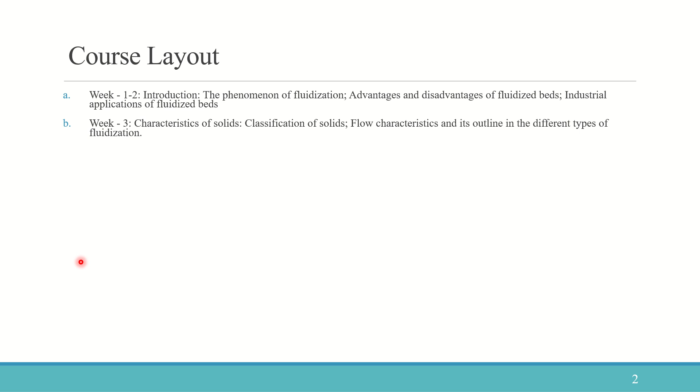Moving on, we have also seen the different regimes of fluidization based on the fluid inlet velocity, and different ways to calculate the frictional pressure drop. Later we saw the solid movement inside the bed in terms of mixing, segregation, staging, and we'll see some more today. We have also seen gas distribution in fluidized beds and why it is important, because we pass the fluid using a distributor, which should ensure that the pressure drop is sufficiently fine.

And design of distributor is also there, like we can use porous plate distributor, perforated plate distributor, and nozzle type, tube type. So based on our application and our economical efficiency, the distributor type would be chosen.

And later it is about the most important thing, bubbling fluidized beds. Why we call it important is because whenever we use the gas as a fluid, bubbles form inside the bed, and we need to be more careful in handling the fluidized beds, because we have an additional phase which becomes important, and we need to know and study the bed

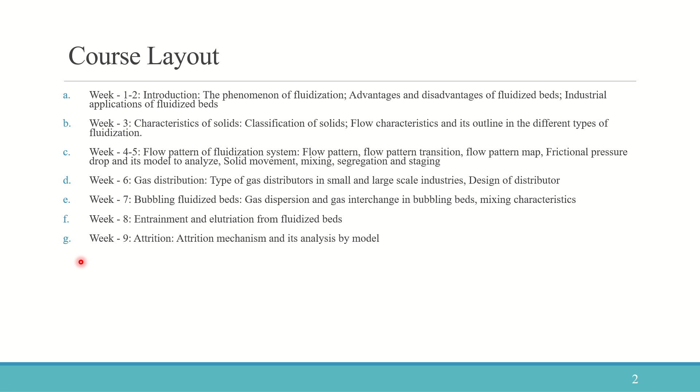accordingly. Later we have also seen about the entrainment and elutriation of the solids from the fluidized beds, wherein the solid particles are carried out of the bed. And last it is about attrition mechanism, and finally it is about mass transfer phenomena and the heat transfer phenomena.

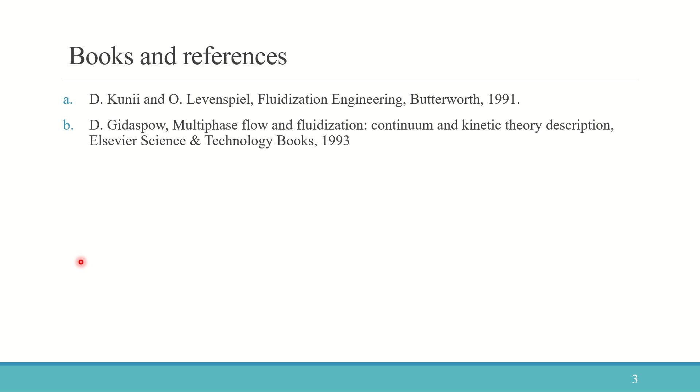So the books basically involve Kunii and Levenspiel's Fluidization Engineering, Gidaspow's Multiphase Flow and Fluidization, Gibilaro's Fluidization Dynamics, and Majumder's Hydrodynamics and Transport Processes of Inverse Bubbly Flows. So we have seen well enough with regards to books and references.

So if you want more detailed analysis of the books and references, I would suggest you see the old videos from week 1 and 2 and so on, which give a more in-depth analysis. Basically, Fluidization Engineering by Kunii and Levenspiel covers almost all aspects with regards to fluidization, and it would be very helpful. And followed by Gidaspow's Multiphase Flow and Fluidization, in which the modeling aspects are also covered.

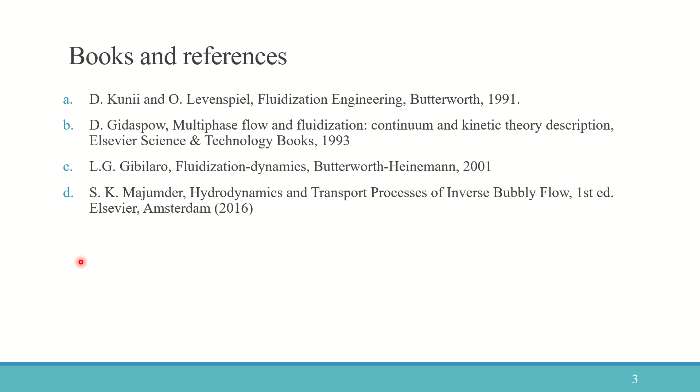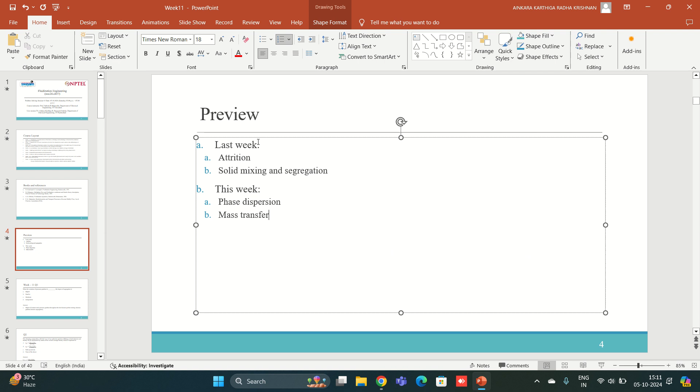So moving on, we have seen in last week the attrition, solid mixing and segregation. And in this week, we'll be seeing about phase dispersion and mass transfer phenomena. Here we have moved on to week 11. So yeah, we'll see now.

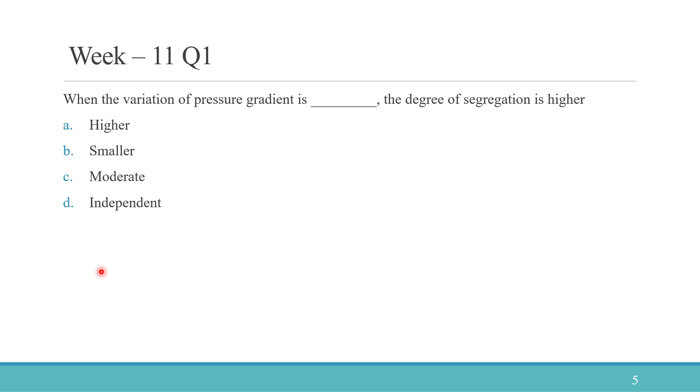Well, the answer to this particular question is option A, higher, because constant axial pressure gradient throughout the bed denotes perfect mixing, whereas higher gradient denotes higher segregation. So if there is a gradient, there is segregation, and if the gradient is higher, the segregation is higher. You can remember it in that way. But if there is a constant axial pressure gradient, the bed denotes a thoroughly mixed bed. So when the variation of pressure gradient is higher, the degree of segregation is higher. Option A is the right answer.

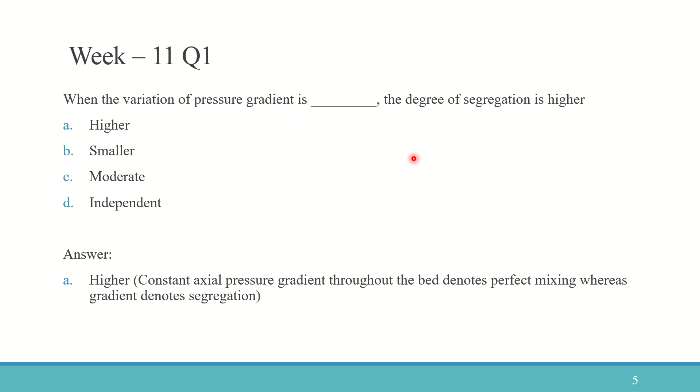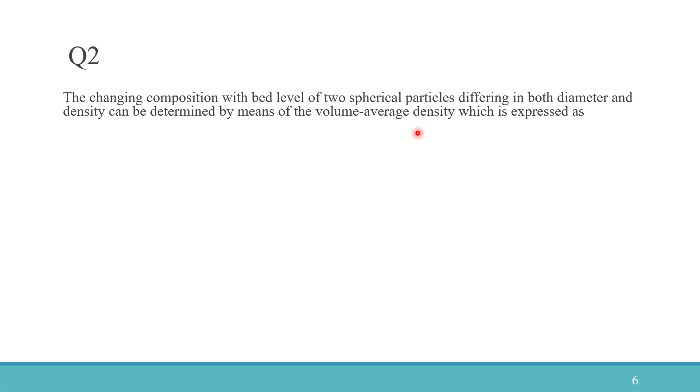Now we'll go to question 2. In question 2, it is given that the changing composition with bed level of two spherical particles differing in both diameter and density can be determined by means of volume average density, which is expressed as dash. Option A, rho_P = (C1 rho_P1 + C2 rho_P2)/(rho_P1 + rho_P2). Option B, rho_P = (C1 rho_P1 + C2 rho_P2)/(C1 + C2). Option C, both A and B. Option D, none of the above.

So we are asked to find the volume average density formula, for which we have two compositions of two spherical particles varying in diameter and density. The density of one particle is rho_p1, the density of the other is rho_p2, and it is based on the concentration. So option B is the right answer: rho_p = (C1 rho_p1 + C2 rho_p2)/(C1 + C2). Actually, if you look at the options themselves, you can understand that we are asked to find the volume average density.

So I'll give you a clue for finding the answer. This is not the exact way to do it, but just a quick clue. If you do the dimensional analysis, you can see that C1 and C2 both have the same unit. So you will be ending up with the unit of rho P1.

Whereas in option A, if you do the dimensional analysis, you will be ending up with the unit of C. Rho P and C don't have the same unit, so option A is wrong. So it can be option B or option D. And logically it sounds more like option B, so rho P is equal to C1 rho P1 plus C2 rho P2 divided by C1 plus C2 is the answer. So I hope it is clear for you guys.

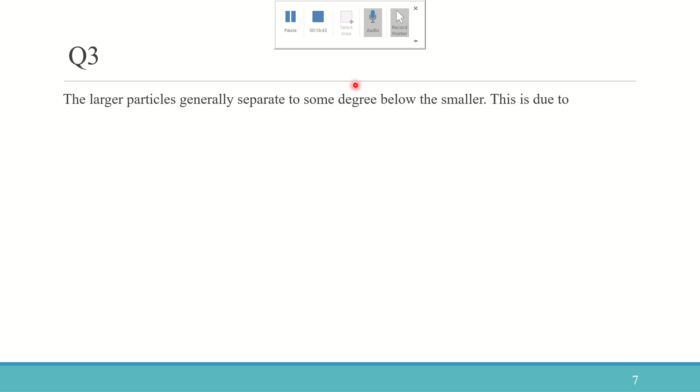Now we'll go to question 3. In question 3, it is given that the larger particles generally separate to some degree below the smaller. This is due to dash. Option A, size variation is less. Option B, bulk circulation is less. Option C, hydrodynamic uncertainty. Option D, all of the above.

So we'll look at the options one by one. First, we'll reread the question. It is given that the larger particles generally separate to some degree below the smaller. So when the larger particles separate to some degree below the smaller, what does it mean? Larger particle separation is lower. When the bulk circulation is more, the separation will be low. And if size variation is less also, the separation will be low.

Here the question generally means: when do we say that segregation is lower? So the larger particle is separating to a very small degree. If size variation is less, it becomes difficult to separate, so in that case the separation is less. And in the second case, it is given as bulk circulation is less. Again, this is true because if bulk circulation is less, it becomes difficult to...

I think I mentioned one wrong statement in the two statements before. But if bulk circulation is less, it is again becoming difficult. And the third one, hydrodynamic uncertainty might also be the reason for the lower degree of separation. So all of the above is the right answer. Now we'll go to question 4.

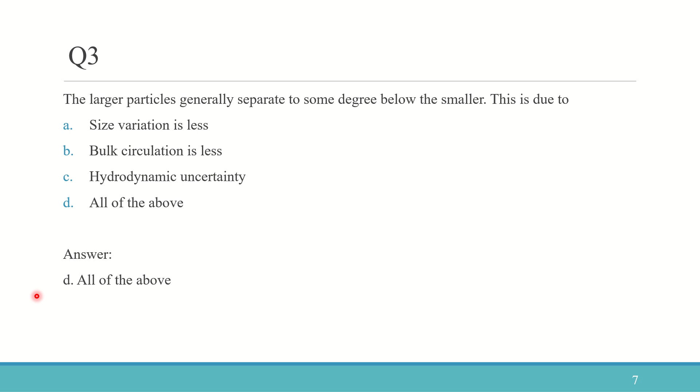In question 4, it is given that according to Richardson-Zaki 1954 theory applied for a monochromatic bed, epsilon s is the volume fraction of solids, and epsilon s is 1 minus epsilon f, and dl and ds are the diameters of a binary mixture of spheres. dl is the diameter of the largest sphere, ds is the diameter of the smallest sphere, and n is the Richardson-Zaki coefficient.

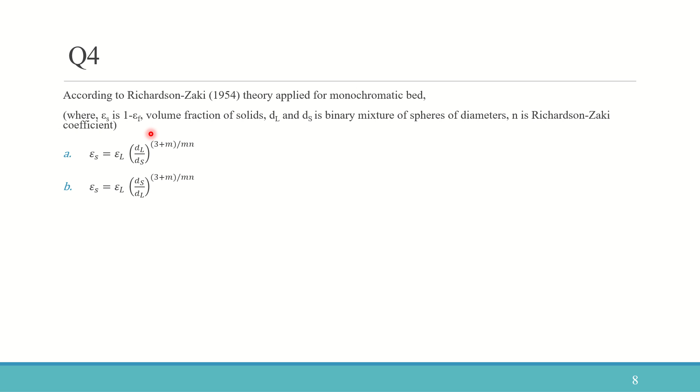Epsilon s is equal to epsilon l into dl by ds to the power of 3 minus m by mn is the right answer. So here we need to know 3 minus m divided by mn, and also epsilon s is equal to epsilon l into dl by ds. So epsilon is inversely proportional to diameter. Solid packing is inversely proportional to diameter. Diameter is small. Yeah, that is true. Epsilon s is inversely proportional to diameter, and we are raising it to the power of 3 minus m divided by mn. So the answer is option C. Now we'll go to question 5.

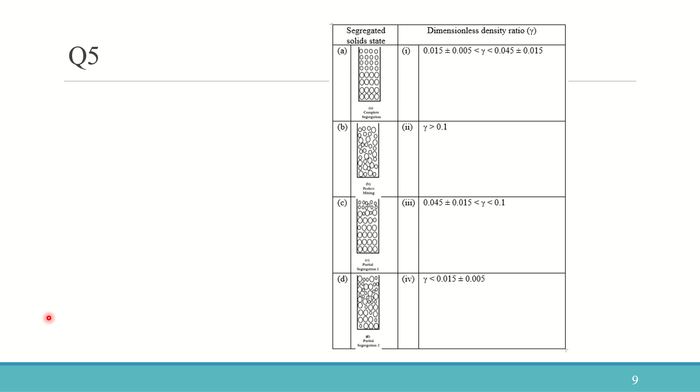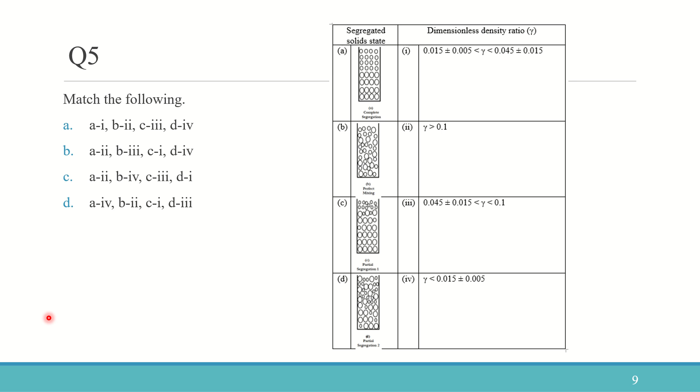Okay, here is an interesting question. We are given segregated solid state on the left hand side and dimensionless density ratio gamma on the right hand side. So we are supposed to match the left hand side with the right hand side. Now we will see the options. Option A, A1 B2 C3 D4. Option B, A2 B3 C1 D4. Option C, A2 B4 C3 D1. Option D, A4 B2 C1 D3.

So I'll give you guys some time. Please let me know the correct answer. If any one of you would come forward and answer, it would be helpful, in the sense that it would be interesting and interaction would be enhanced rather than me saying the answer. That would be great.

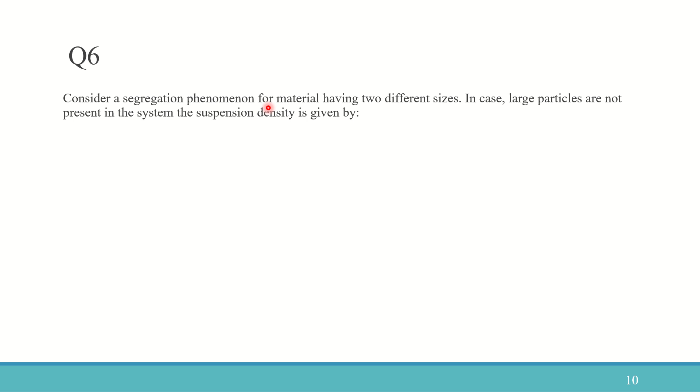In question 6: consider a segregation phenomenon for a material having two different sizes. In case large particles are not present in the system, the suspension density is given by blank. We'll read the question again. Before the options: rho is the liquid density, rho p is the particle density, and epsilon s is the volume fraction of smaller particles.

Option A, rho bs equals rho p into 1 minus epsilon square plus rho into epsilon s. Option B, rho bs equals rho p into 1 minus epsilon s plus rho into epsilon s. Option C, rho bs equals rho p into 1 minus epsilon s square plus rho into epsilon s square. Option D, rho bs equals rho p into 1 minus epsilon s minus rho into epsilon s.

So we have two sizes, a smaller size particle and a larger size particle. Its solid fraction is epsilon s and this solid fraction is epsilon L. The liquid fraction is epsilon and its density is rho. This density is rho s and this density is rho L. If both particles are present, we need to know the density of each and every particle.

But what is given: we are considering a segregation phenomenon with two size particles. If larger particles are not present in the system, then the suspension density is given by blank. So larger particles are not present; we have only smaller particles and the liquid density. So it is rho into

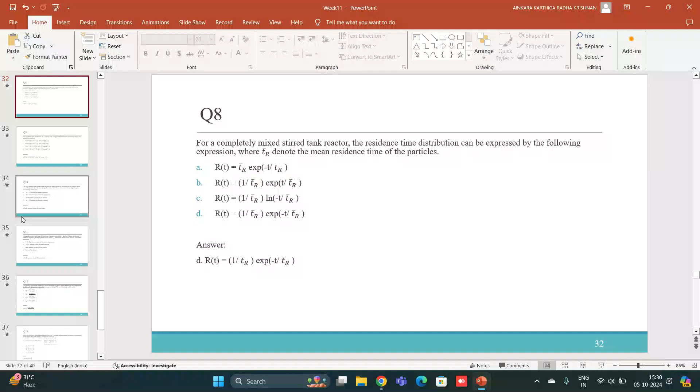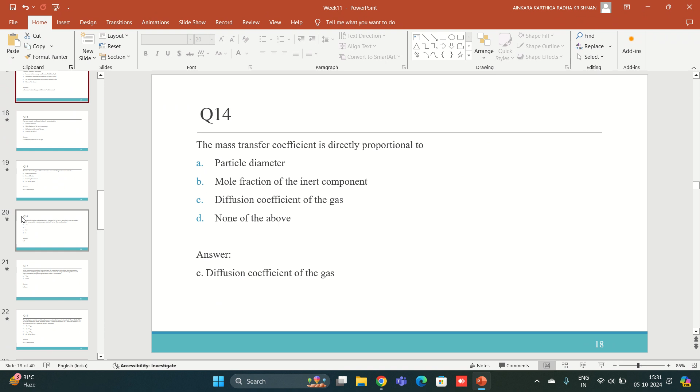Just give me a moment.

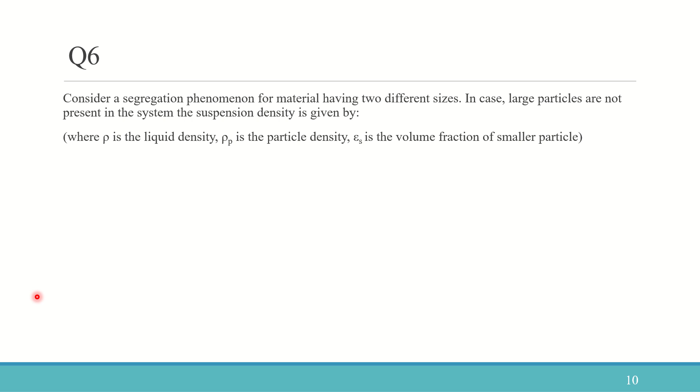So as I was saying, rho is the liquid density, rho p is the particle density, and epsilon is the volume fraction of smaller particles. And rho bs is equal to rho p into (1 minus epsilon s) square plus rho into epsilon s. Rho bs is equal to rho p into 1 minus epsilon s plus rho into epsilon s.

And rho bs is equal to rho p into (1 minus epsilon s) square plus rho into epsilon s the whole square, and it is rho p into 1 minus epsilon s minus rho into epsilon s. So answer is option B actually. Rho bs is equal to rho p into 1 minus epsilon s plus rho into epsilon s. That is the answer. So option B is the right answer.

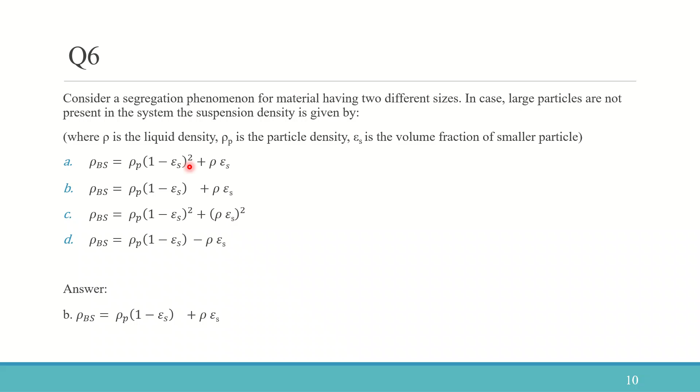We'll go to question 7. In question 7, it is given that the inversion condition is expressed as dash, where UPHS is the segregation velocity of smaller denser particles and U is the velocity. So option A, dUPHS divided by du is equal to 0. Option B, dUPHS divided by du is equal to 1. Option C, dUPHS divided by du is greater than 1. And option D, dUPHS divided by du is less than 1.

So actually option A is the right answer. dUPHS by du is equal to 0. At the inversion velocity, the entire bed attains the uniform composition equal to the overall solids composition. So we say that the variation of the segregation velocity of the smaller denser particles with velocity is 0. So option A, dUPHS divided by du is equal to 0 is the right answer.

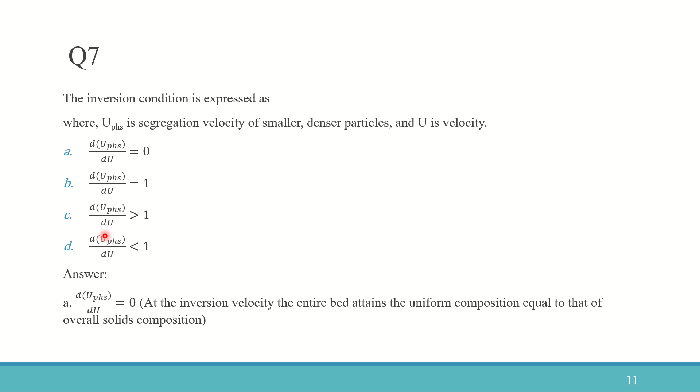And now we'll go to question 8. In question 8 it is given that the dispersion model is represented as dou Ca by dou t is equal to DGV dou square Ca by dou Z square minus U into dou Ca by dou Z. In case a steady flow of tracer gas is injected at a point in a tall narrow fluidized bed, which of the dispersion model's parameters will become 0 while measuring the upstream diffusion of tracer for the vertical dispersion process? Options are A dou Ca by dou t, option B DGV into dou square Ca by dou Z square, option C U, option D none of the above.

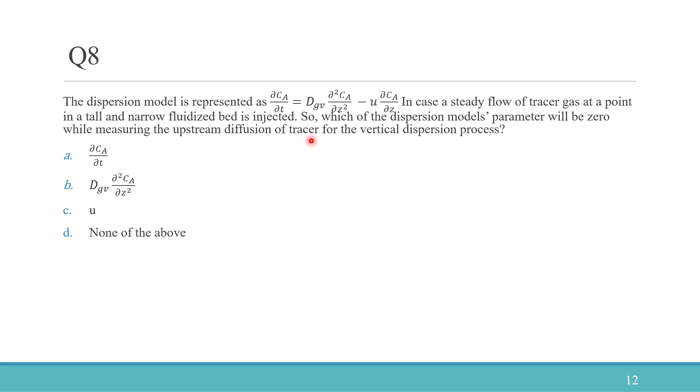So in case a steady flow of tracer gas is injected at a point in a tall, narrow fluidized bed, which of the dispersion model's parameters will become 0? It is a very simple question. Since it is a steady flow of tracer gas, the concentration variation with respect to time would be 0. So dou Ca by dou t will become 0. Option A is the right answer.

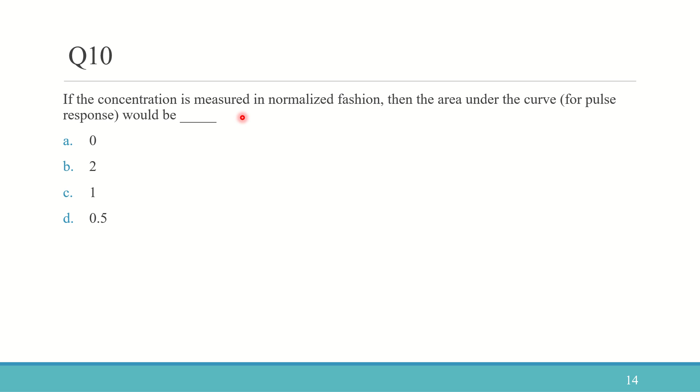Now we will go to question 10. If the concentration is measured in normalized fashion, then the area under the curve for pulse response would be dash. Since it is normalized and it is a pulse response curve, we know it is 1. Looking at the options, option A 0, option B 2, option C 1, option D 0.5. So the area under the curve is 1. Option C is the right answer. I think you're getting the point.

So we'll go to question 11. Actually there are no problematic questions till question 20. I mean, I think the whole session we don't have any problems. Mostly theory questions, so by now you people are almost familiar with the theoretical aspects, so nothing new will be coming for you guys.

So if you are thorough in the theory and you feel you're confident enough, it is okay. It will be repetitive for you guys, but yeah, we'll see. We can discuss more if you have any doubts, any problems, anything, whatever you want, we can discuss.

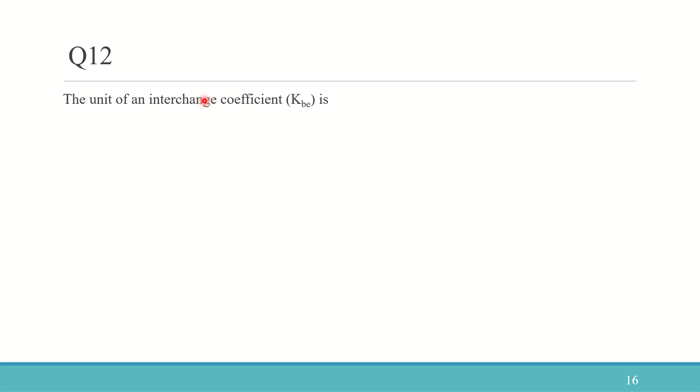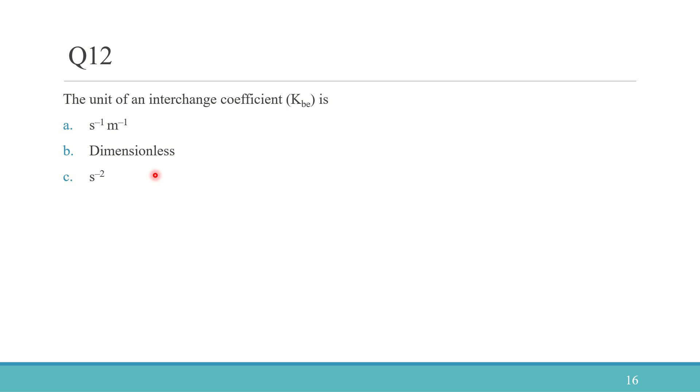Just give me a moment, you read the question. The unit of an interchange coefficient KBE is dash. Option A per second per meter. Option B dimensionless. Option C per second square. Option D per second. So just think of the answer. I'll be back in a minute.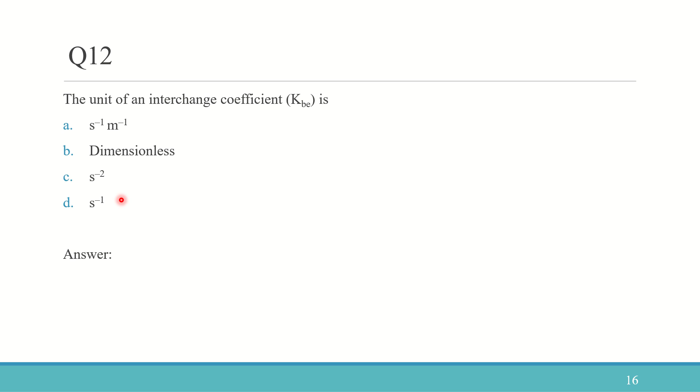So the answer for this particular question is option D. Per second is the answer. We'll go to question 13.

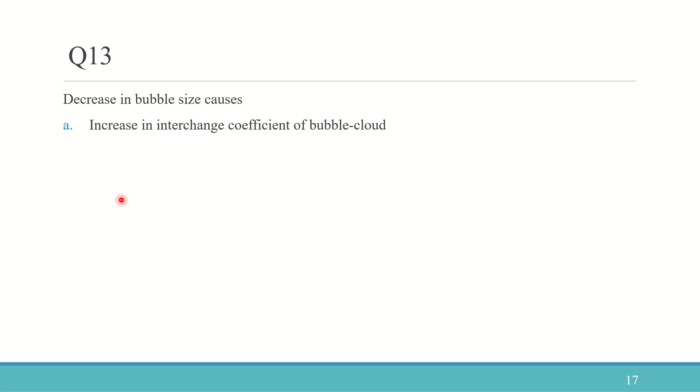In question 13, decrease in bubble size causes dash. Increase in interchange coefficient of bubble cloud. Decrease in interchange coefficient of bubble cloud. No effect on interchange coefficient of bubble cloud. Option D, none of the above. So actually these two are inversely proportional. So decrease in bubble size causes increase in interchange coefficient of bubble cloud is the right answer. So answer is option A.

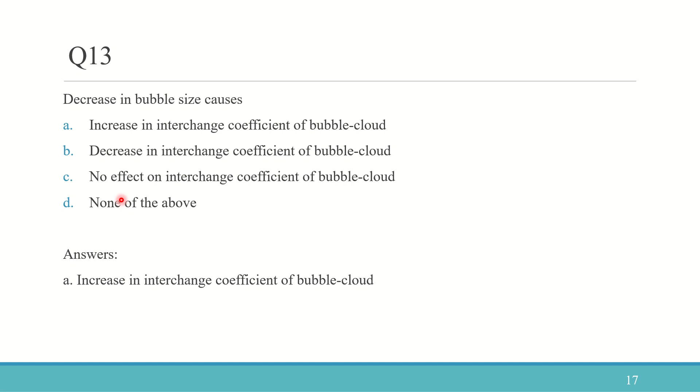question 14, in which it is asked that the mass transfer coefficient is directly proportional to dash. Option A particle diameter, option B mole fraction of the inert component, option C diffusion coefficient of the gas, option D none of the above. So mass transfer coefficient is directly proportional to diffusion coefficient of the gas, and it is inversely proportional to particle diameter and mole fraction of the inert component. So that is option C.

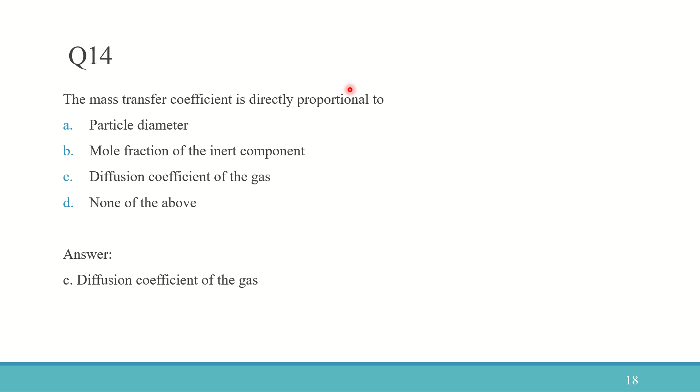So K into dp by D is constant. So K is directly proportional to diffusion coefficient of the gas. Now we go to question 15. In question 15 it is asked that based on the kind of gas solid reactions, the rate controlling mechanisms include dash. Option A, gas film diffusion. Option B, pore diffusion. Option C, surface phenomenon. Option D, all of the above.

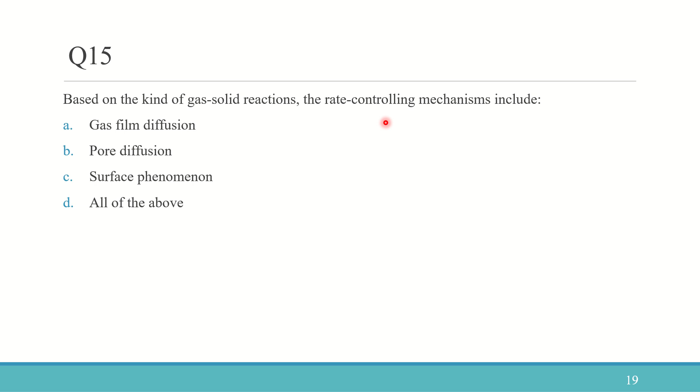So can anyone say the answer for this question? Answer is all of the above. So based on the kind of gas solid reactions, the rate controlling mechanisms can be any of these. It can be gas film diffusion, it can be pore diffusion, or it can be surface phenomenon. All these things happen in the gas solid reactions because we have the bubble cloud, everything.

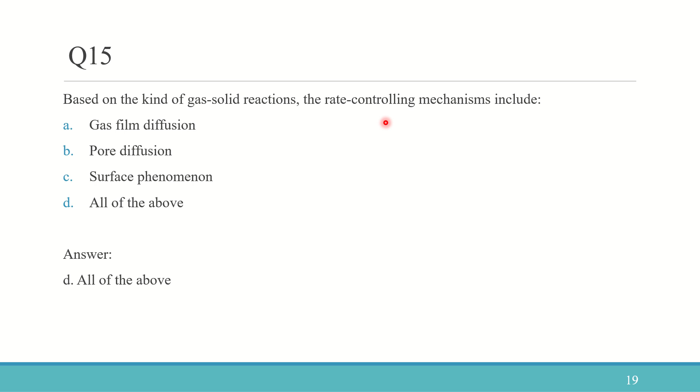So the rate controlling mechanisms can be gas film diffusion and also the pore diffusion, which is through the particles, and surface phenomena on the surface of the particle or in the surroundings of the particles. So answer is all of the above. Now let us go on to question 16.

In question 16 it is given that the Sherwood number is mathematically written as Sherwood number equals 2 plus 0.6 into Reynolds number to the power of 0.5 and Schmidt number to the power of 0.33. Consider the particle is exposed to a stationary gas. What will be the Sherwood number? Option A 2.6, option B 2, option C 2.9 and option D 0.

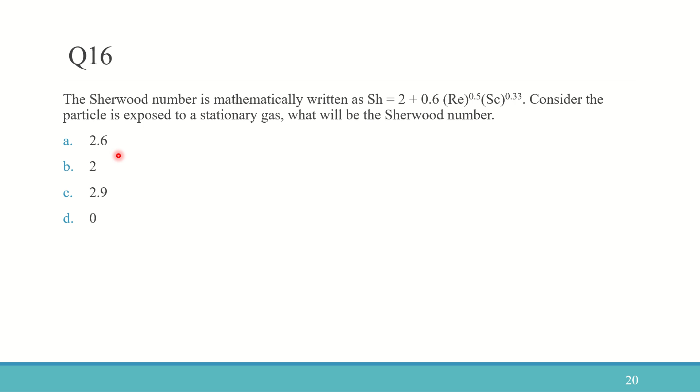So what is given? Sherwood is equal to 2 plus 0.6 into Reynolds number to the power of 0.5 and Schmidt number to the power of 0.33. And here the particle is exposed to stationary gas. What will be the Sherwood number? If particle is exposed to stationary gas, Reynolds number will become 0 and so the second term becomes 0. So Sherwood number becomes 2. So answer is option B, 2.

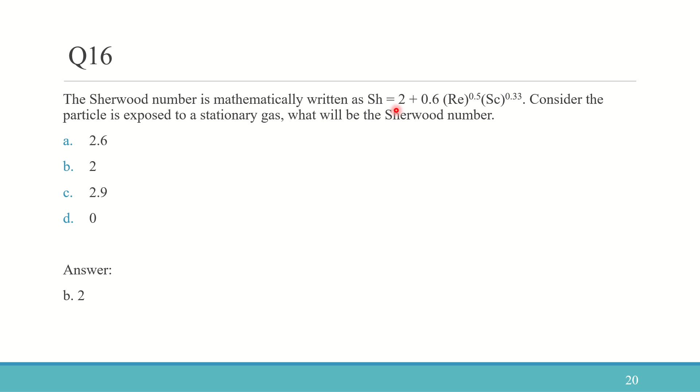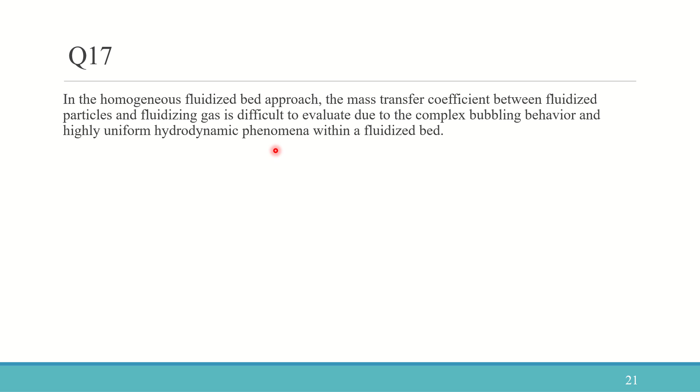Now we'll go to question 17. In a homogeneous fluidized bed approach, the mass transfer coefficient between fluidized particles and fluidizing gas is difficult to evaluate due to the complex bubbling behavior and highly uniform hydrodynamic phenomena within a fluidized bed. Option A true, option B false.

So you are supposed to answer: in the homogeneous fluidized bed approach, the mass transfer coefficient between fluidized particles and the fluidizing gas is difficult to evaluate due to the complex bubbling behavior and highly uniform hydrodynamic phenomena within a fluidized bed. Option A true or option B false.

So I want you guys to think for a minute and give me the answer, or else I can give you the answer and I want you to give me the reason. You can either tell me or I'll just take a minute to analyze the situation and give a proper explanation. So the answer is actually false.

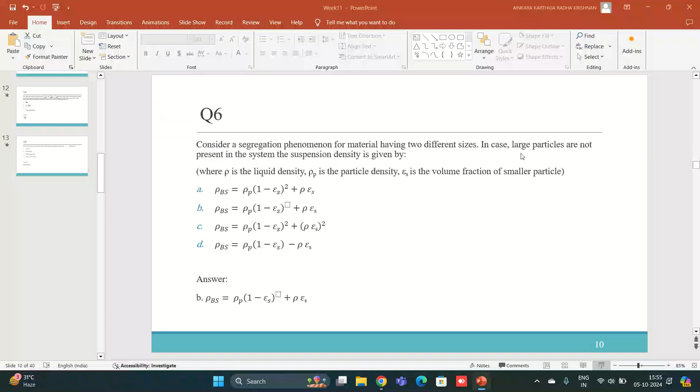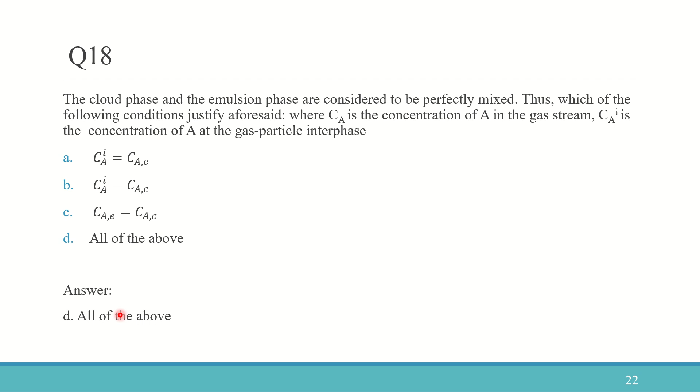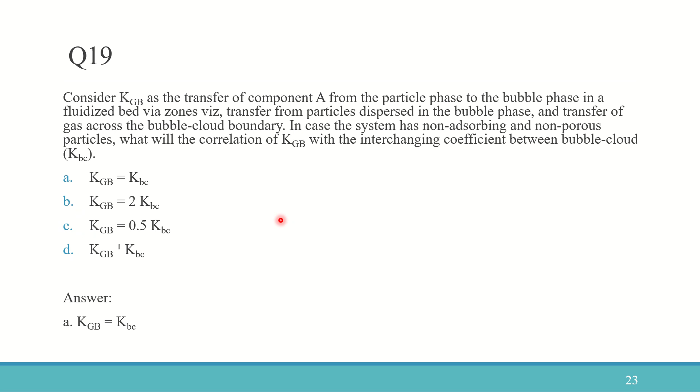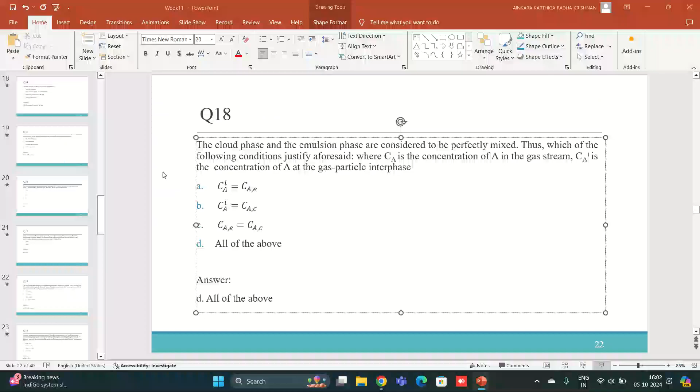So now we have covered the questions from week 11. These 20 problems will, I hope, be helpful for you when you are solving the assignments. Now we are going to see week 10 assignment problems, and we have 15 more problems, and again all of these are theory based questions, so it won't take much time.

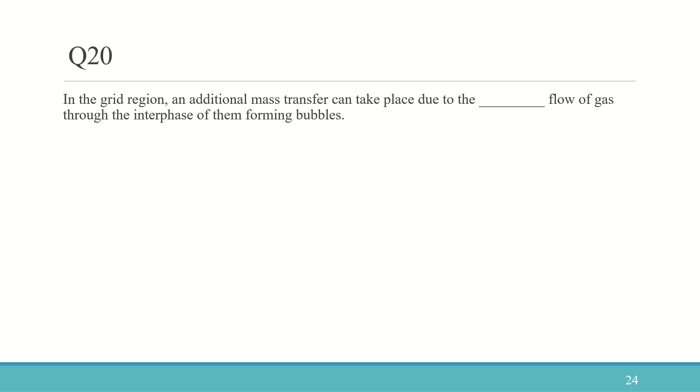Coming back, we have 1 minute left. So I'll just tell random things, I guess.

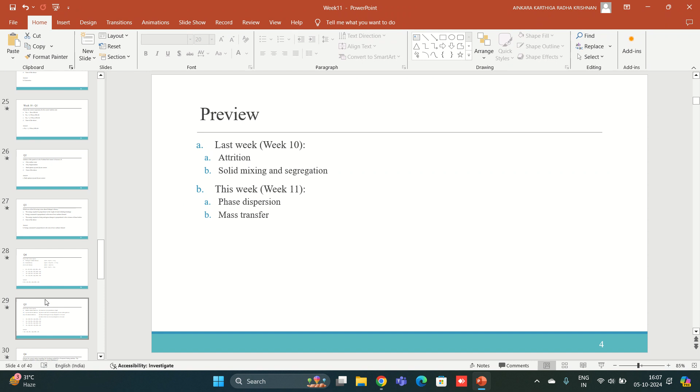Do you remember what we have seen last week? It is about attrition and those things. So we'll start there. We have seen attrition, solid mixing and segregation, those type of questions in the last class. And today we are going to see some problems from there also, just an extension.

So it is week 10 and question 1. Choose the correct expression for the overall attrition rate. Option A, RAO, that is overall attrition rate, is equal to minus W bed into dWL divided by dt.

And oh, okay. Why did it go here suddenly? What was I saying?

RAO is equal to minus W bed into dWL by dt. W bed is the weight of the particles in the bed, and dWL is the elutriated solids weight. Option B, RAO is equal to 1 by W bed into dWL by dt. Option C, RAO is equal to minus 1 by W bed into dWL by dt. And option D, none of the above.

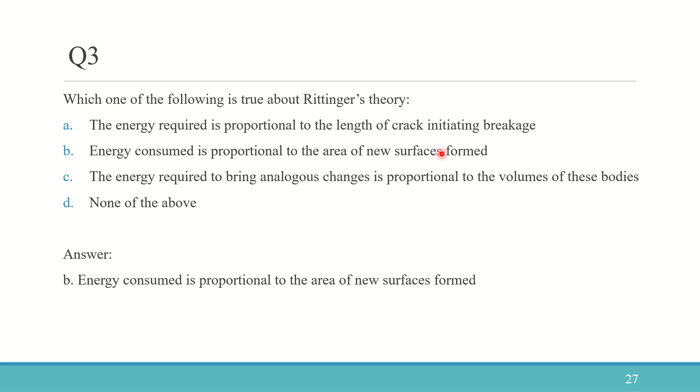So we will deal with the other two theories in the next question, like the formula. But for now, Rittinger's theory states that energy consumed is directly proportional to the area of the new surfaces formed. So now we have a question wherein we are asked to match the correct one. We have different comminution theories on the left hand side and the corresponding formula on the right hand side. The first one is Rittinger's surface theory, second one is Bond's theory, and third one is Kick's theory.

And on the right hand side we have P: E is equal to C into 1 by x2 plus 1 by x1, Q: E is equal to 2 times C into 1 by root of x2 minus 1 by root of x1, R: E is equal to minus ln of x2 by x1, and S: E is equal to C into 1 by x2 minus 1 by x1. So let's look at the options once. Option A, 1P 2Q 3R. Option B, 1S 2R 3Q.

Option C, 1Q 2S and 3R. Option D, 1S 2Q and 3R. Option D is the right answer. Rittinger's theory, as we all know, is about new surfaces formed. So S, E is equal to C into 1 by x2 minus 1 by x1.

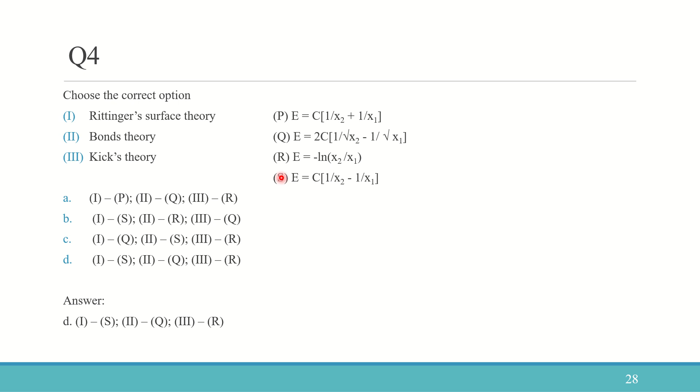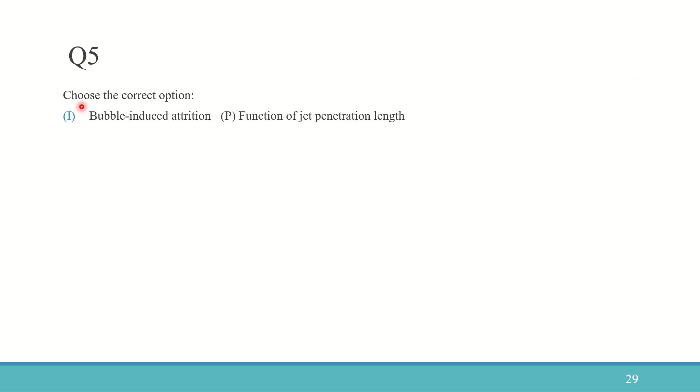In question 5, choose the correct option. Again, it is a match. On the left hand side we have 1, bubble induced attrition, 2, cyclone driven attrition, and last one, 3, jet induced attrition. On the right hand side we have 4 options. P, it is a function of jet penetration length; Q, it is due to force exerted by the cyclone on the particles; R, it is due to high velocity interparticle collision; and S, it is due to low velocity interparticle collision.

So we have option A, 1R, 2Q, 3P; option B, 1S, 2R, 3Q; option C, 1S, 2Q, 3P; option D, 1Q, 2S, and 3R. So the right answer is actually 1S, 2Q, 3P.

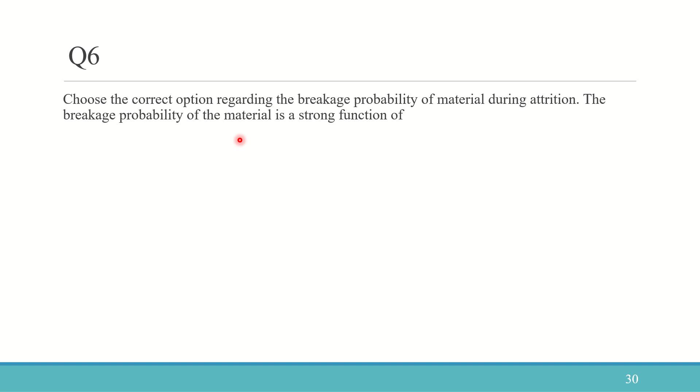Choose the correct option regarding the breakage probability of material during attrition. The breakage probability of the material is a strong function of blank. Option A, cyclone inlet gas velocity. Option B, particle concentration and its size. Option C, material specific constant. Option D,

all of the above. So the answer is actually all of the above. Option D, all of the above, is the answer. So how is it about the breakage probability of the material during attrition?

So the breakage model actually is used to predict the change in the particle size distribution of the material that undergoes stress in the gas cyclone, and it actually depends on four factors. The first one is the cyclone inlet gas velocity, so option A is true. The second and third are particle solids load and particle size, so particle concentration and its size. And the last one is a material specific constant, so option C is also right. So all of the above is the right answer.

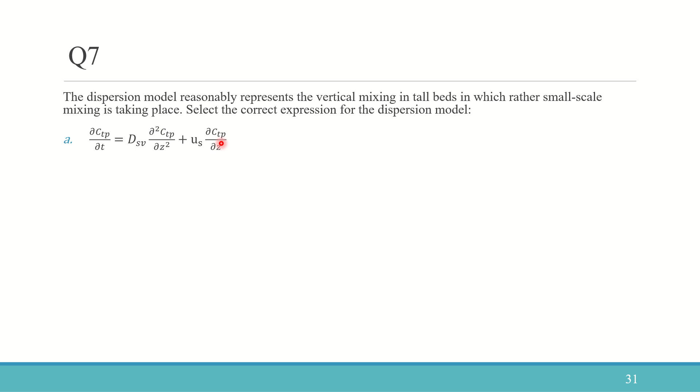In question 7, the dispersion model reasonably represents the vertical mixing in tall beds in which rather small scale mixing takes place. Select the correct expression for the dispersion model. Option A, ∂Ctp/∂t = Dsv ∂²Ctp/∂z² + Us ∂Ctp/∂z. Option B, ∂Ctp/∂t = Dsv ∂²Ctp/∂z² − Us ∂²Ctp/∂z².

Option C, ∂Ctp/∂t = Dsv ∂²Ctp/∂z² − Us ∂Ctp/∂z. Option D, ∂Ctp/∂t = Us ∂²Ctp/∂z² + Dsv ∂Ctp/∂z. Option A and option C are similar except for the change of sign.

So here we need to know the dispersion model is nothing but ∂C/∂t = D ∂²C/∂z² minus U ∂C/∂z. So here we are using the dispersion model, and we can see that only option A or option C can suit the dispersion model according to the equation. Option D is wrong equation-wise. Similarly, option B is also wrong. So actually option C is the answer.

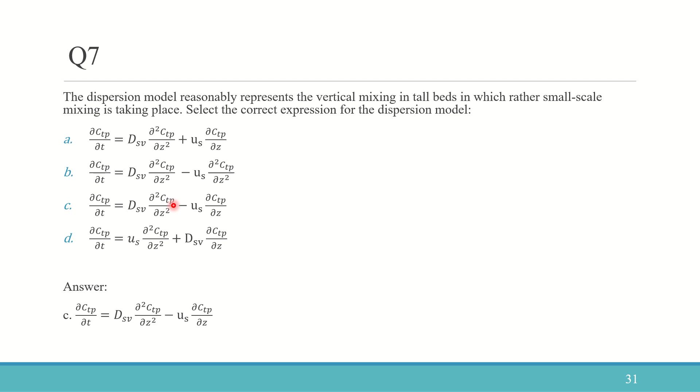In question 8, it is given that for a completely mixed stirred tank reactor, the residence time distribution can be expressed by the following expression, where tr bar denotes the mean residence time of the particles, and we are asked to find the residence time distribution. Option A, R(t) = tr bar exp(−t/tr bar). Option B, R(t) = 1/tr bar exp(t/tr bar).

Option C, R(t) = 1/tr bar ln(−t/tr bar). And option D, R(t) = 1/tr bar exp(−t/tr bar). So the answer is actually option D.

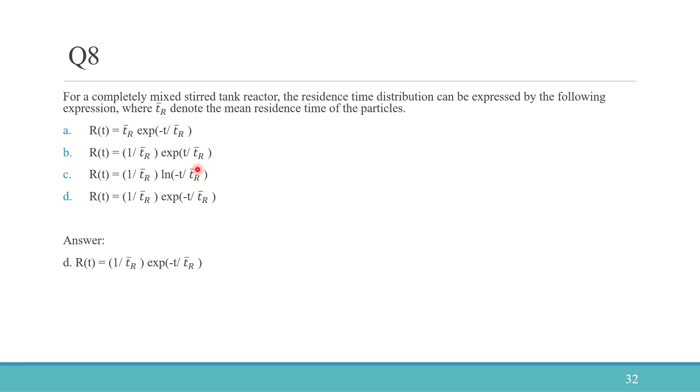R(t) = 1/tr bar exp(−t/tr bar). Here tr bar denotes the mean residence time of the particles and R(t) is the residence time distribution, and the residence time distribution is equal to 1/tr bar exp(−t/tr bar). So option D is the right answer. Now let us go on to question 9. I think it is a similar question.

The residence time distribution for a system with n stages of fluidized bed reactors of equal size can be calculated as: option A, R(t) = 1/(n−1)! ti bar 1/ti exp(t/ti bar). Option B, R(t) = 1/(n−1)! ti bar 1/ti bar exp(−t/ti bar).

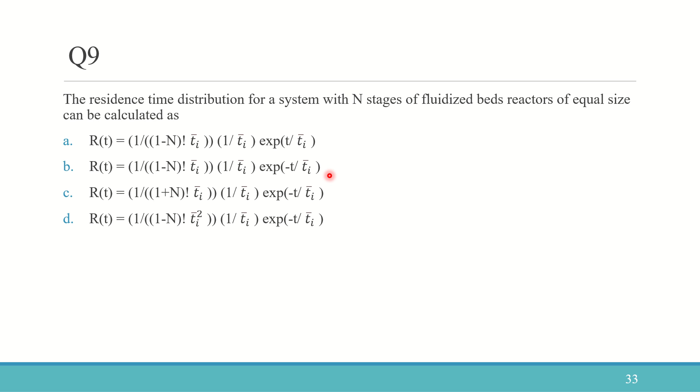Option C, R(t) = 1/(n+1)! ti bar 1/ti bar exp(−t/ti bar). Option D, R(t) = 1/(n−1)! ti bar squared 1/ti bar exp(−t/ti bar).

So answer is actually option B is the answer. R of t, residence time distribution for a system with n stages of fluidized bed reactor of equal size, can be calculated as: 1 by ti bar into exponential of minus t by ti is the residence time distribution in a one case.

So here it is 1 by (n minus 1) factorial into ti bar. So that alone comes extra, but other than that, the original expression remains. So option B is the right answer. Option B, R of t is equal to 1 by (n minus 1) factorial into ti into exponential of minus t by ti is the answer.

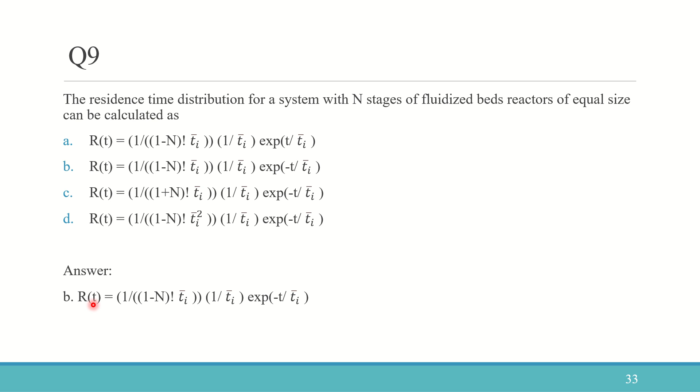So now we'll go to question 10. In the 10th question, it is given that solid mixing index is defined as the ratio of mass fraction of gypsum in the top portion of the bed to the gypsum mass fraction in a perfect mixed bed. Select the correct answer regarding the solids mixing index M. We have seen this question in the last week. It's a similar question, not exactly the same.

So here M denotes the solids mixing index. It is defined as the ratio of the mass fraction of gypsum in the top portion of the bed divided by the mass fraction of gypsum in the perfectly mixed bed. We are asked to identify what M signifies. Option A, M is equal to 1 indicates complete mixing. Option B, M is equal to 0 indicates complete segregation. Option C, both options A and B are correct. Option D, M is equal to 0 indicates complete mixing.

So, first we'll see what M signifies. M is the ratio of gypsum in the top portion of the bed to the gypsum mass fraction in the perfectly mixed bed. So, if the bed is perfectly mixed, the mass fraction of gypsum in the top portion would be equal to the mass fraction of the gypsum in the perfectly mixed bed. That means M is 1 for a completely mixed bed. So M is 1 indicates complete mixing; A is true.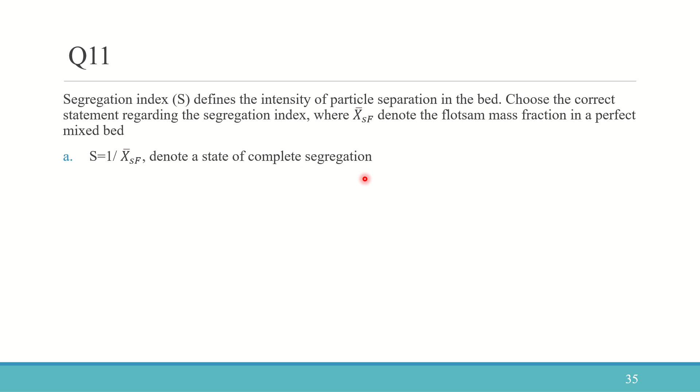So in a segregated state, flotsam will be at the top. So mass fraction is 1. So S is equal to 1 divided by XSF denotes a state of complete segregation. So option A, S is equal to 1 by XSF denotes a state of complete segregation. That is true. Option B, S is equal to 1 denotes a state of perfect mixing.

Again, this is true. If the bed is perfectly mixed, flotsam mass fraction in the top of the bed will be equal to the flotsam mass fraction in a perfect mixed bed. So the ratio becomes S is equal to XSF divided by XSF, so it becomes 1. S is equal to 1 denotes a state of perfect mixing, means true. Option C, both options A and B are correct. Again this is true. Option D, none of the above. So therefore option C is the right answer.

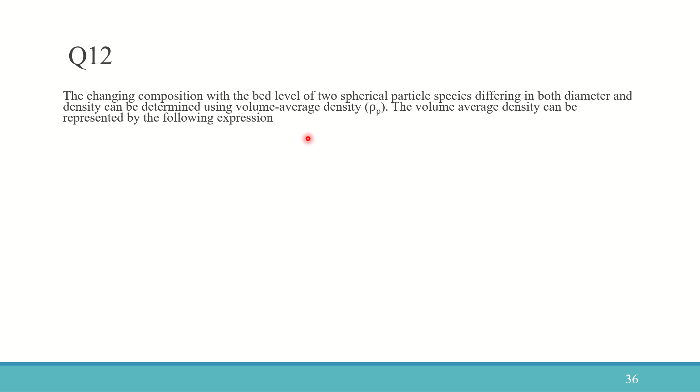Now we are going to question 12. In question 12, the changing composition with the bed level of two spherical particle species differing in both diameter and density can be determined using volume average density rho p. The volume average density can be represented by the following expression. Option A, rho p is equal to C1 rho p1 plus C2 rho p2 divided by rho p1 plus rho p2. Option B, rho p is equal to C1 rho p1 plus C2 rho p2 divided by C1 plus C2. Option C, rho p is equal to C1 rho p2 plus C2 rho p1 divided by C1 plus C2.

Option D, rho p is equal to C2 rho p1 plus C1 rho p2 divided by C1 plus C1. So we all know the answer to this question because in the first part of the lecture today, we have seen the answer to this. So the right answer is option B. Rho p is equal to C1 into rho p1 plus C2 into rho p2 divided by C1 plus C2. We have seen the explanation there. So now we are going to move on to the next question, that is question 13.

Choose the correct option for bed suspension density where rho p, rho, epsilon s, epsilon l denote the particle density, liquid density, volume fraction of small particles and volume fraction of large particles respectively. We are asked to match. On the left hand side we are given in the absence of smaller particles and in the absence of larger particles. On the right hand side, P, rho bs is equal to rho p into 1 minus epsilon s plus rho into epsilon s. Q, rho bl is equal to rho p into 1 minus epsilon l plus rho into epsilon l. R, rho bl is equal to rho p into 1 minus epsilon l plus rho p into epsilon l. And S, rho bs is equal to rho p into 1 minus epsilon s plus rho p into epsilon s.

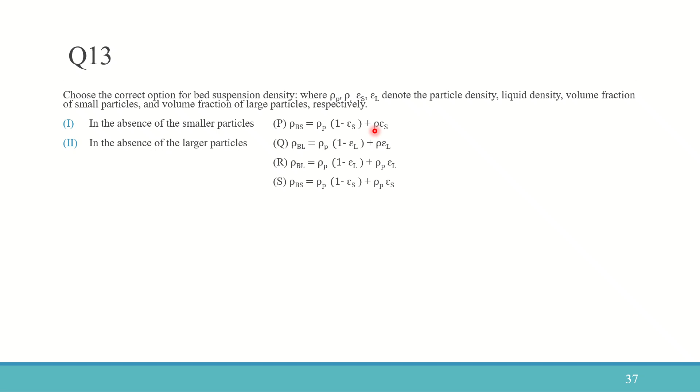So 1 Q, 2 P. P is the right answer. We look at the options now. Option A 1R 2Q. Option B 1S 2R. Option C 1Q 2P. Option D 1P 2Q. So what is the answer? The answer is 1Q 2P is the right answer.

So accordingly, option C is the right one. 1Q 2P is the right answer. Now we will go on to question 14. In question 14 we have, as per Richardson-Zaki 1954, the voidage epsilon for the monocomponent bed is represented by dash. Again, these questions we have seen in the first part of today's class. So this is just a repetition, I guess. But still we'll see the answer.

Option A, epsilon s is equal to epsilon L into ds by dl to the power of 3 minus m by mn. Option B, epsilon s equal to epsilon L into dl by ds to the power of 3 minus m by mn. Option C, epsilon s is equal to epsilon L into dl by ds to the power of mn by 3 minus m. Option D, epsilon s is equal to epsilon L into dl by ds to the power of 3 plus m by mn. So,

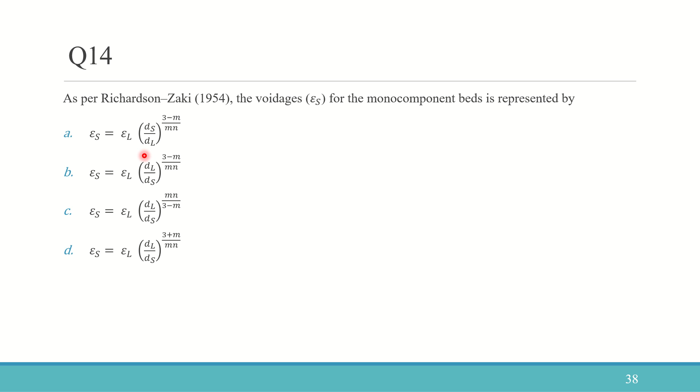Answer, as we have seen, epsilon is inversely proportional to D. So epsilon s is equal to epsilon L into, it should come as dl by ds. So straight away we can eliminate option A, and the answer is to the power of 3 minus m divided by m into n. So answer is option B. Option B is the right answer.

So now we will go on to question 15. And that is the last question for today's session. In question 15 we have, choose the wrong answer regarding attrition. We are asked to choose the wrong answer. Remember that we are not asked to choose the correct one here. So we are asked to choose the wrong one.

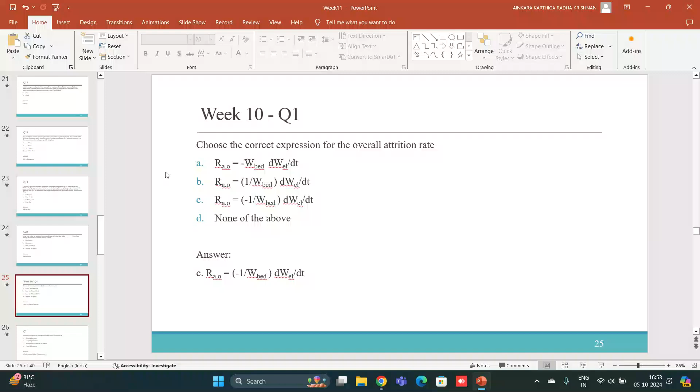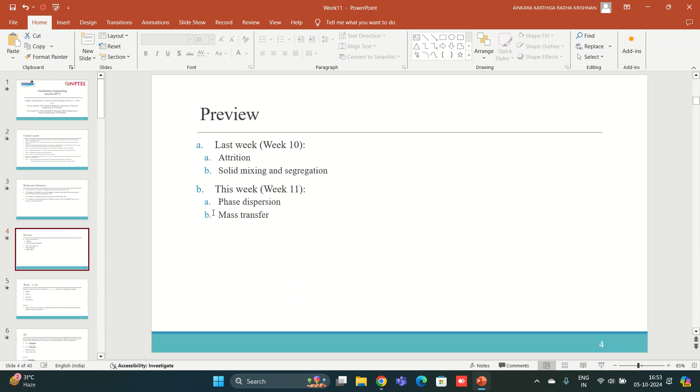So as a quick revision, in today's class we have seen 20 problems from week 11 and 15 problems from week 10. So in the first part of the session, we have seen how mass transfer phenomena happens in the system and also the interchange coefficients. All those things we have seen in the first part of the session. And in the second part of the session, it is more about solids mixing, segregation and attrition. And in the first one, we have seen the phase dispersion and the mass transfer phenomena.

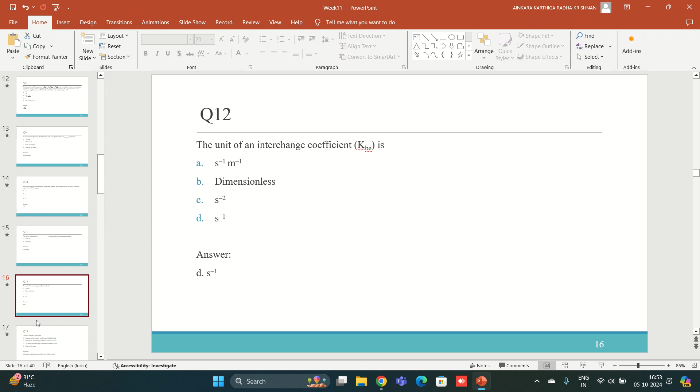So I think mostly we have seen only the theory aspects in today's class. There was no problem in today's session. So yeah, I think it is straightforward.